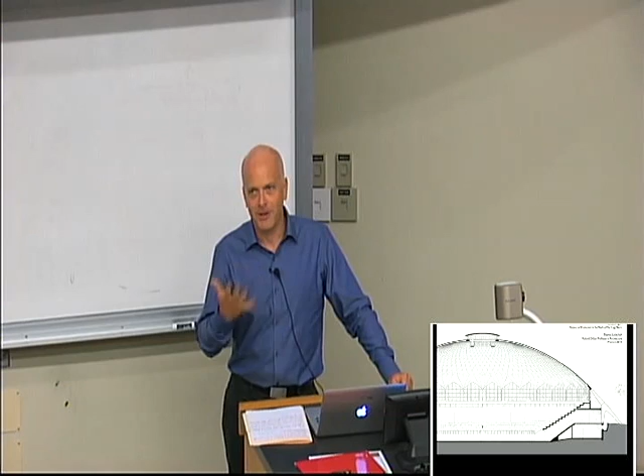I'm going to try to tell a good story, of course, but I've tried to put just enough English on it so that I have an excuse to show you some really amazing stuff. There are some new drawings that I did, which are fine, but there are also a whole lot of construction photos, drawings and sketches from Nervi's archives that have never been published before, and some of them I'm absolutely sure have never been seen outside of the archives before. So I'm very glad that you all get to be the first to see some of these.

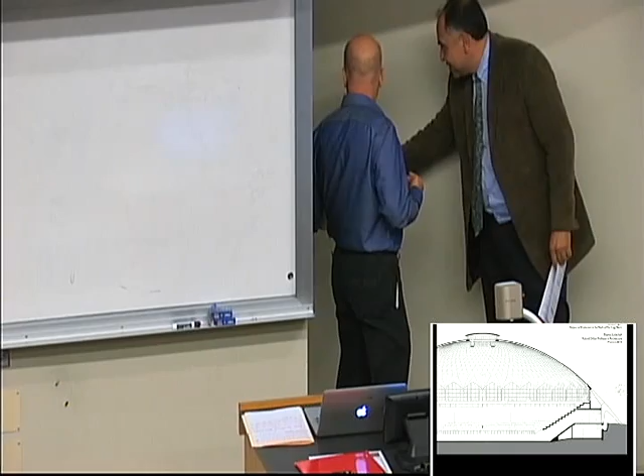Can I get the— Kimberly, which light switch is it? That one? Huh.

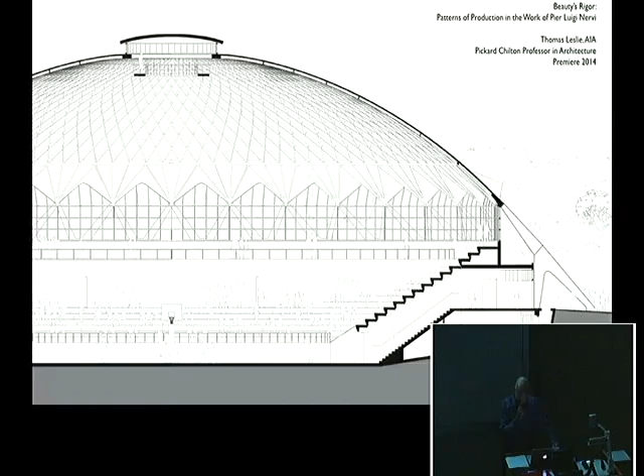The title of my talk tonight, and the sort of working title for the project, is Beauty's Rigor. And this comes from a long poem written by William Carlos Williams. One of the great things about a fellowship at the Academy is that you have time, and you get to do things like read that you don't often get to do in daily life. And this is one of Williams's best known works, but maybe one of his least read because it's such a huge—

Oh, you don't want to see me, you want to see the slides, I'm sure. All right. Perfect. All right. It takes more than a village. It takes a small town, for sure.

So this poem by Williams, called Paterson, which he took 10 years to write and publish—and not coincidentally, this is exactly the time of some of the most important buildings by Nervi that I'll show you. But more importantly, there's a kind of thematic resonance here. Williams was trying to argue for a kind of return to the real world. High modernism had been very abstract in literature, and Williams was trying to get back down to the stuff of life. And to do this, the poem's set in Paterson, New Jersey, and his point was trying to prove that beauty—unlike this opening line of the poem where he says that beauty is locked in the mind—he wanted to show that beauty was out in the world. And I'll come back to this and explain why this kind of frames the talk I want to give tonight.

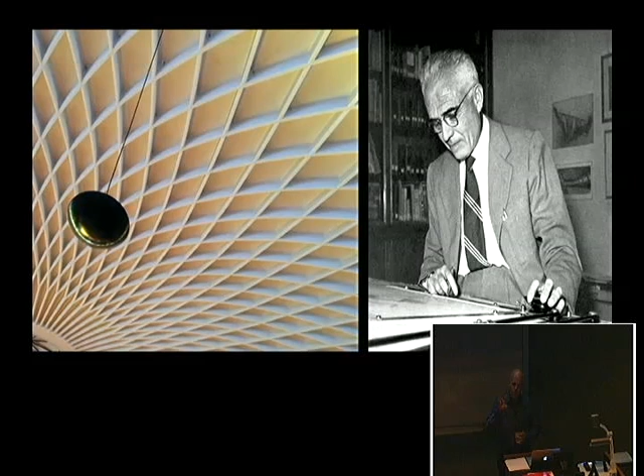And this, to me, has become increasingly important. I've always been interested in structural engineering. I've been more and more interested in how structural engineering and construction kind of argue with one another, and in turn argue with design, and how really good designers are able to synthesize all three of these things. So for me, Nervi is perfect. He's trained as an engineer, trained as a builder, not trained as an architect—although his son was, and his son Antonio played a bigger and bigger role in the firm through the 60s.

The project that I went to Rome to do involved trying to understand where Nervi's work came from, why his work seems so much more engaging, so much more beautiful, so much more thoughtful than a lot of the structural engineering and architecture that went on during the same era. And what I came back with is an understanding that Nervi was uniquely poised to take advantage of things that were going on in Italy. But his career was also uniquely constrained by the economy, by the political situation, and by the resources that he had to work with.

And like many great architects, like many great designers, those constraints didn't necessarily frustrate him, but they actually forged this very disciplined approach to designing things and to building things. And the engineering, the design, the building all sort of reinforced each other because they had to.

I want to talk about those constraints tonight, and I want to talk about how Nervi forged this way of working out of them. And then I want to blow that up into this larger discussion about ideas and things, and about why we think of beauty and rigor as separate things, and maybe why we should think of them as conjoined instead. So the talk will be in three brief acts.

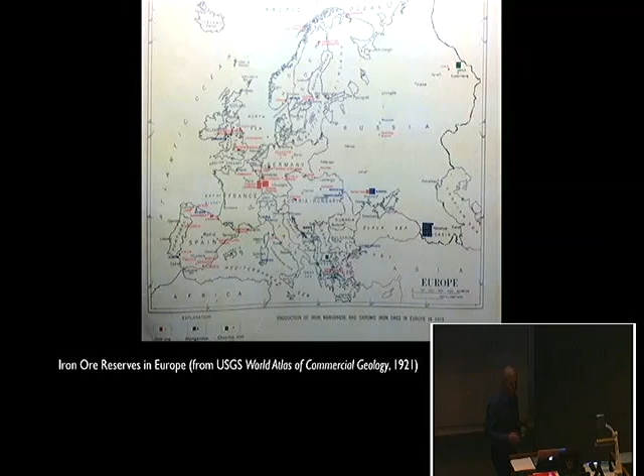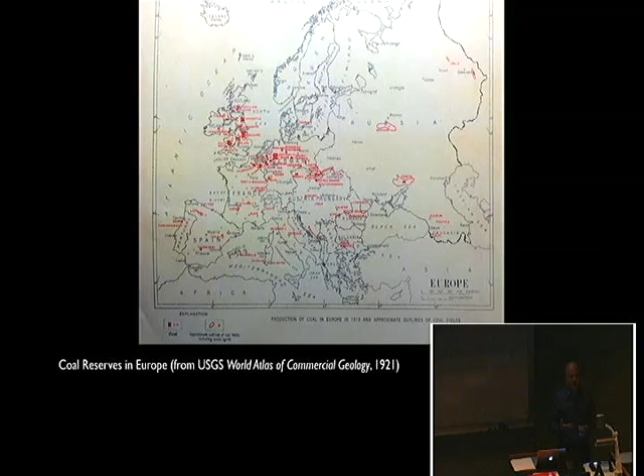There's a similar map that shows coal reserves in Europe. These are both published in 1921, right about the time Nervi was beginning his own practice, early in his own practice. And you see the same thing - Italy has not only always had to import its iron, but it's had to import its energy. It has no naturally occurring coal resources to speak of. It has to bring coal in the 1920s from Great Britain. And it's also had to do this with petroleum. So it has an iron deficit and it has an energy deficit.

One of the solutions you see in the southern European countries to the lack of metal, to the lack of steel, is a reliance on concrete. When we think of the great concrete engineers, particularly Torroja in Spain and Nervi in Italy, these are southern European phenomena. And there's a kind of southern European approach to concrete that again comes from necessity. There's not enough steel to build like they did in France and Germany and England. And so they instead turned to concrete.

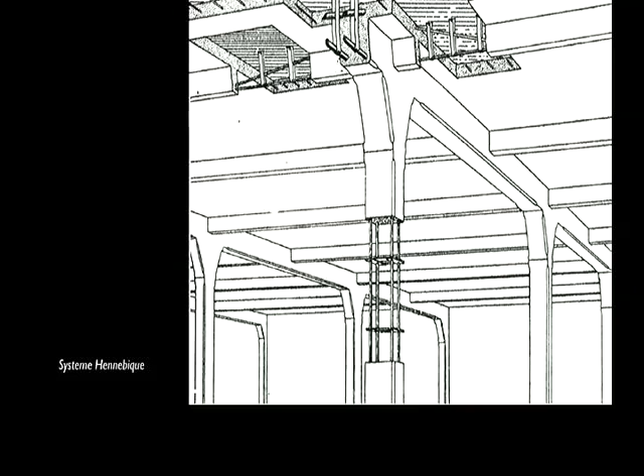Concrete was perfected as a structural material really in France by Hennebique around the end of the 19th century. And you can see that in the Système Hennebique, he has taken concrete's strength in compression and combined it with minuscule amounts of steel reinforcement that take up the tension that goes into a bending member. And what this means is that you're essentially tricking concrete into thinking that it's a metal, into thinking that it's steel, into behaving like that.

It can take bending in a way that raw concrete or stone or brick can't take. And you can see the development of these skeletal systems of concrete around the end of the century that sort of look like steel skeletons, but are built predominantly with the material that was cheaper and that was available in more parts of Europe.

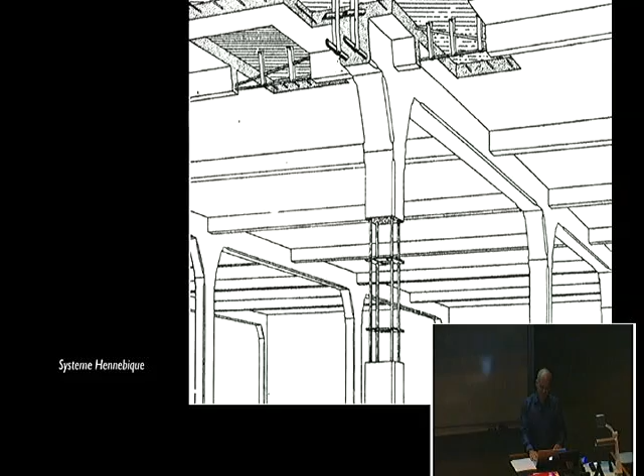The Système Hennebique applied not only to buildings, warehouses, and factories, but also to bridges. In 1911, when Nervi was a young student in engineering school, one of the great achievements in concrete engineering happened in Rome: the Tiber River, bridged for centuries with multiple stone arches, was finally bridged in a single span using the patented Hennebique system. It was designed and built by a licensee named Porcheddu, relying on the monolithic nature of concrete.

There's a famous incident where German engineers wrote to Porcheddu and professors at the University of Rome saying, 'We're very worried. We've seen the drawings for this bridge, we've done the calculations, and it simply can't stand. It's too thin. You need to stop construction immediately.' The letter that went back said, 'Thank you very much for your concern, we finished the bridge six months ago and it's fine.'

Nervi told this story over and over again. As big a fan of concrete as he was, he hated academic engineers, and used to tell it as the lesson that what's actually out there in the world, what's actually tested, is important. The reason the Ponte Risorgimento stands when traditional methods say it should fail is that concrete is monolithic.

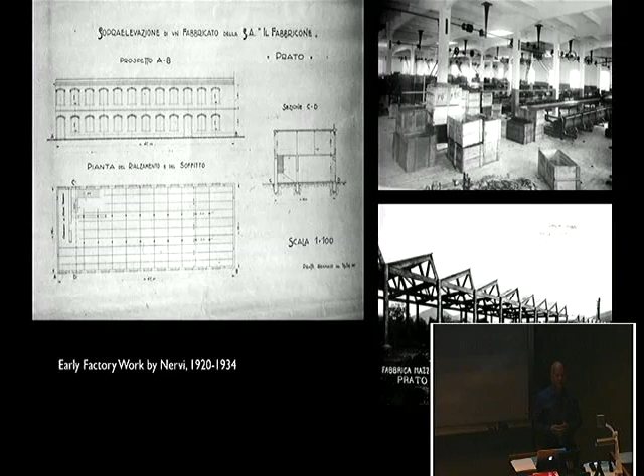He went to work for Muggia and then set out on his own in 1920, and for several years did very pragmatic factory buildings, particularly in the textile town of Prato. These are all essentially based on Hennebique's system. If you look at the image on top, you basically see a reinforced concrete skeleton, very much like Hennebique had patented, nothing really terribly innovative.

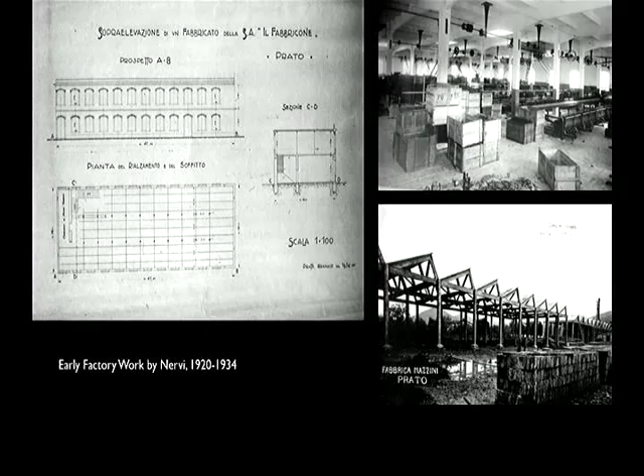Nervi developed a reputation as a very effective designer of factories and warehouses. You can see at the bottom a thoughtful approach to things like daylighting, long span structures, and trusses, all executed in concrete.

But Nervi's early career occurred against a political background impossible to ignore. In the 1920s in Italy, Mussolini had just come to power in 1922, and part of his propaganda campaign relied on autarky, that Italy should be entirely self-sufficient and didn't need the rest of the world. This got even more serious in the 1930s after the country invaded Ethiopia, and the rest of the world brought crippling economic sanctions down, forcing Italy into this very serious autarkic economic policy.

In some sense, this meant concrete was even more desirable, because all the materials for concrete were available in country, while reinforcing steel was not, making this a difficult negotiation. You see buildings by architects like Piacentini, such as the University of Rome, constructed in 1935, of what Nervi called weak concrete—concrete that was almost all bearing, under-reinforced, without the amount of steel we'd typically expect today.

You can see that the columns here are very big, the windows very small. It looks like a Roman brick building in terms of its proportions, and it's clad in travertine, which was Italy's number one kind of building material to export. So this is seen as an autarkic building by the fascist regime.

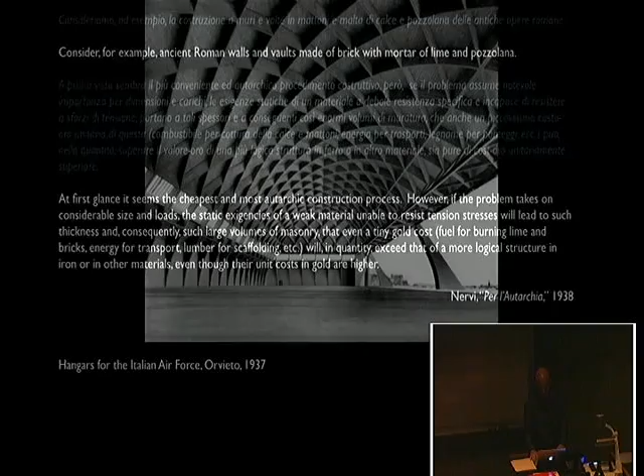Nervi's strongest argument for concrete, though, was this incredible set of hangars he built for the Italian Air Force in the late 30s. He got the commission in part because he had this dual office—a structural engineering office and a contracting office—and he was able to undercut all of his competitors. He did this in a couple of ways.

The initial set of hangars built at Orvieto in 1937 have this vaulted lamella roof. Lamella just means diamond-shaped, and what those ribs do is trick the concrete shell into thinking it's much deeper than it really is, behaving like a much deeper shell. People often think of the Pantheon, which has these great deep coffers that scoop out dead weight of the dome so it thinks it's really thick but only weighs as much as a thinner dome.

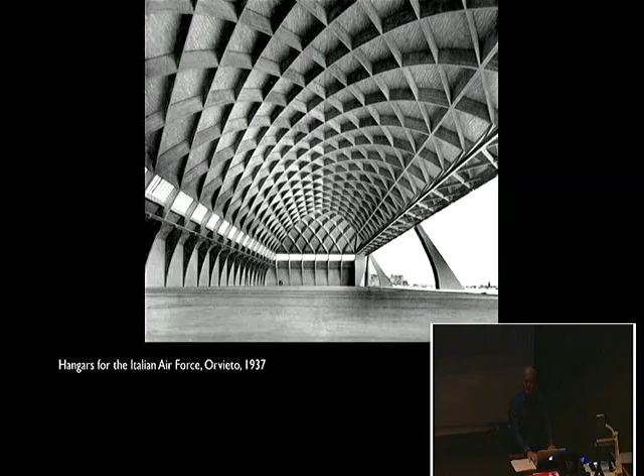There's a similar process here. The lamella pattern means the hangar roof resists gravity loads and wind loads with the same ribs, the same structures. You can see it's set up on relatively skinny buttresses that run all the way around the back. This was a cheaper hangar than anything the Italian Air Force had built to that date, and there was the claim that it was sort of autarkic, that this was all done in concrete.

This is where the archives come in. Nervi wrote a couple of very cryptic things where he said that actually these hangars were kind of a failure, and never really elaborated on it. But when you look at the construction process, what you realize is that the monolithic nature of that concrete, the fact that the shell is all one piece, meant that Nervi had to build the hangar twice—a complete timber formwork for the entire hangar, then pour the concrete into that formwork.

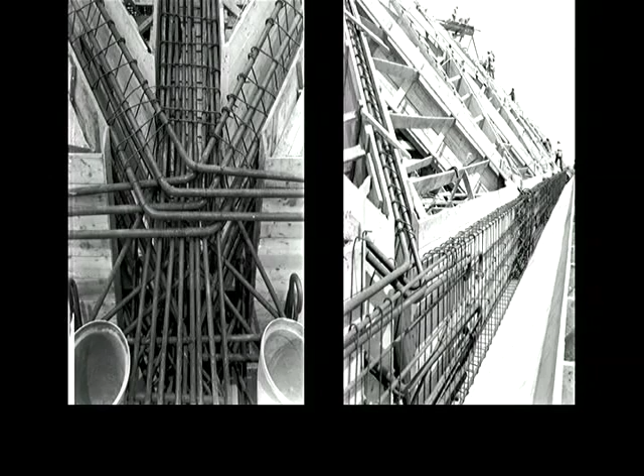As for the reinforcing, this was a real shocker to find: as those ribs come down and collect all of this force, all of these loads, as they enter into those buttresses, what you're looking at isn't really concrete. What you're looking at is steel with a little bit of concrete painted on the outside. This is a heavily, heavily reinforced solution.

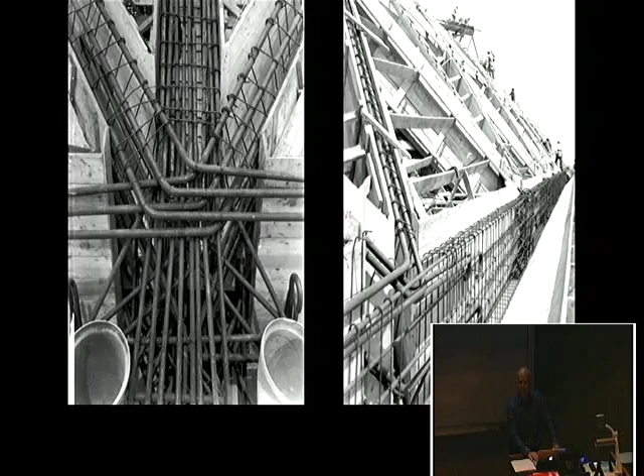Nervi wrote sort of despairingly of these, that everyone thought they were incredible examples of new engineering, and Nervi alone knew that they were essentially a failure, that they were claimed to be autarkic, when in fact they were heavily reliant on foreign materials.

Nervi's solution to this was to try to find a way to eliminate most of the timber formwork - to see if he could actually prefabricate elements of the hangars, lift them into place on smaller, lighter formwork, and then use small bits of reinforced concrete to glue all those pieces together, to get a monolithic structure out of a lot of very small pieces.

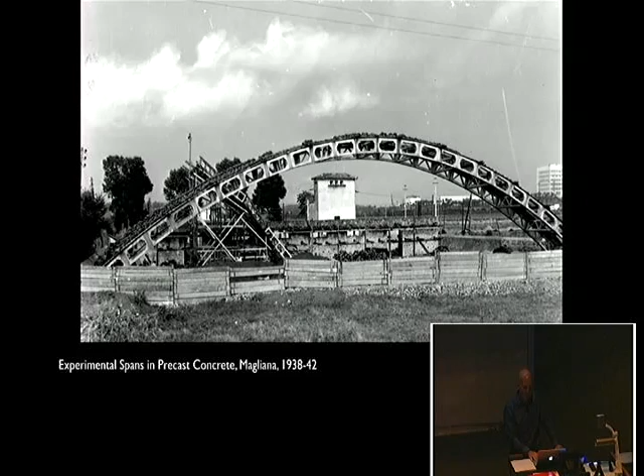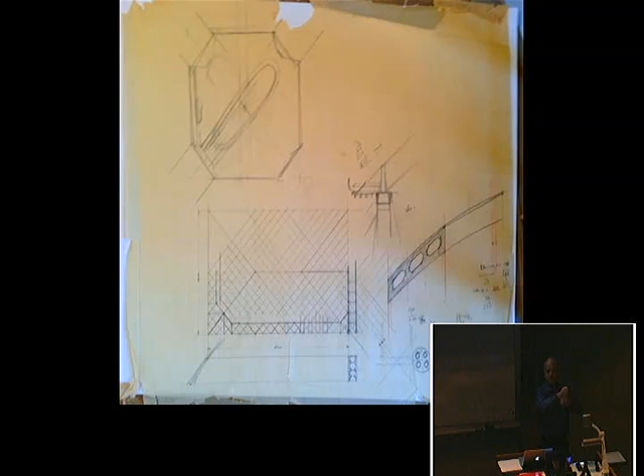And on top, he's showing little loops of steel reinforcing sticking out of the ends of one of those truss pieces. The octagon is a very small amount of poured concrete that's going to grip onto all of those loops of rebar and essentially make all of these little precast Lego blocks into one solid unit. He's found a joint he's going to use to make a monolithic structure out of a lot of very, very small elements.

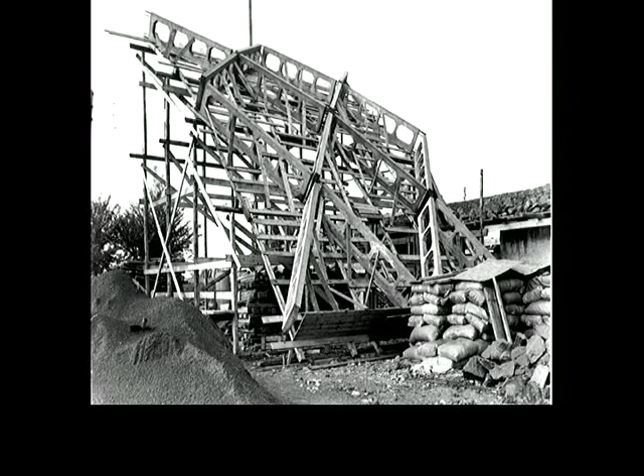And when you look at the construction photos from Magliana where he's building prototypes, this is exactly what he does. You can see that the units are sort of four bays of truss. There's a little void there, and if you look closely, you can see the reinforcing sticking into the void.

And now they're going to come along and fill that void with concrete. As the concrete cures, it's going to grab onto all of those little bits of rebar and make a very monolithic joint.

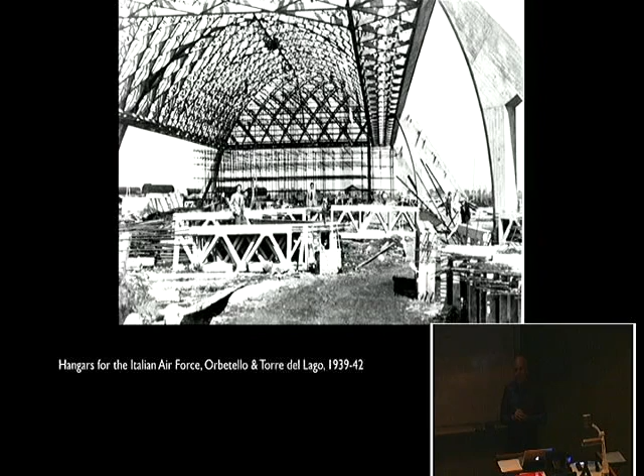In 1939, he gets another commission for more hangars, these in Orbetello and Torre del Lago on the west coast of Italy. And in the construction photos from these, you can see a couple of interesting things.

He's precasting the truss work on the ground, so they don't have to be pouring a lot of concrete up in the air. He's lifting them into place on cranes, and you can see that the formwork covers about one eighth of the entire structure - that is all the scaffolding he needs to put these in place. Once that concrete's cured, he can remove that scaffolding, move it to the next bay, and repeat the process.

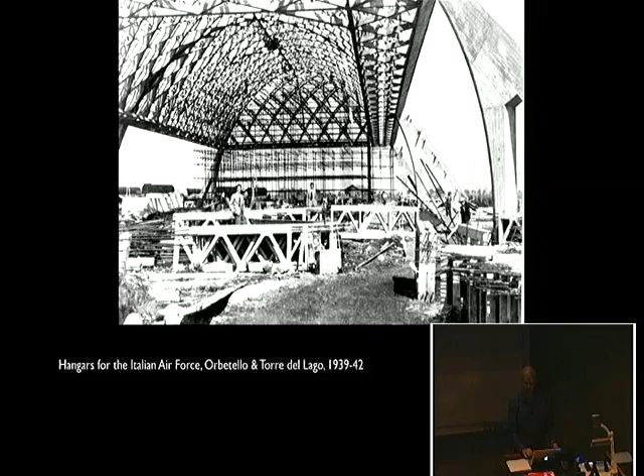So he's saved on timber formwork - he doesn't have to build the entire thing out of wood and then out of concrete. He's saved on timber scaffolding, because he only needs this little bay to pour one kind of unit at a time. And he's saved on reinforcing, because instead of solid concrete, he's built the roof out of trusses. The trusses weigh less, which means the support that holds all of these up carries less load, and therefore needs less steel. It's kind of a miraculous transformation.

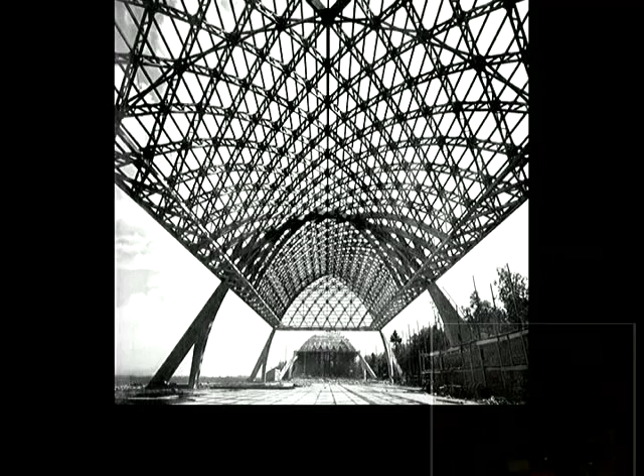And the results, aesthetically, are absolutely amazing, too. Another interesting thing that happens is as these are approaching completion, Nervi's construction documentation goes from sort of a guy on site taking photos to hiring a company called Studio Vasari, an architectural photographer in Rome known for shooting high-end apartments and major public spaces.

Nervi realizes that there's something really, really beautiful about these hangars that deserves better treatment than just the guy on site documenting progress. Vasari shoots these very famous photographs of the hangars before the lightweight roof covering goes on. You can see that they're open trusses, very lightweight, and that things get dense at the junctions.

That's the reinforced concrete holding these pieces together. And you can see that they're now standing, instead of on the 24 buttresses around the back, on 6 points, 6 buttresses that are just barely touching this roof. That's how lightweight, how much weight Nervi saved with this precasting process.

These were all blown up by the German army when they retreated. And there are two stories about that. One, the official one, is that Nervi was heartbroken and that the shells actually bounced, right? They were so, the concrete did its work so well that the shells came down to the ground intact.

The story that I've heard that I can't back up, but that I really want to believe, is that someone comes into Nervi's office and says, you know, the Germans have blown up the hangars, and Nervi says, thank God, every day I've worried they were going to fall down on their own. I don't have to do that anymore.

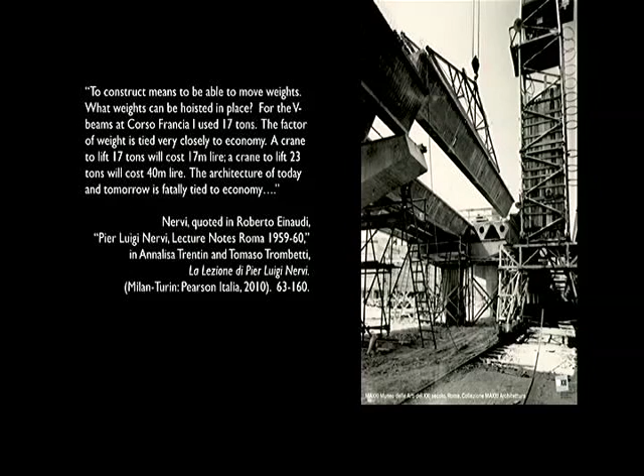The factor of weight is tied very closely to economy. A crane to lift 17 tons costs 17 million lira. A crane to lift 23 tons costs 40 million lira. So this ethic of autarky, even though by the 1950s it's history in Italy, has stuck with him. Nervi is constantly looking for the most efficient way to build, to make things as light as possible, and to use the least equipment on the job site.

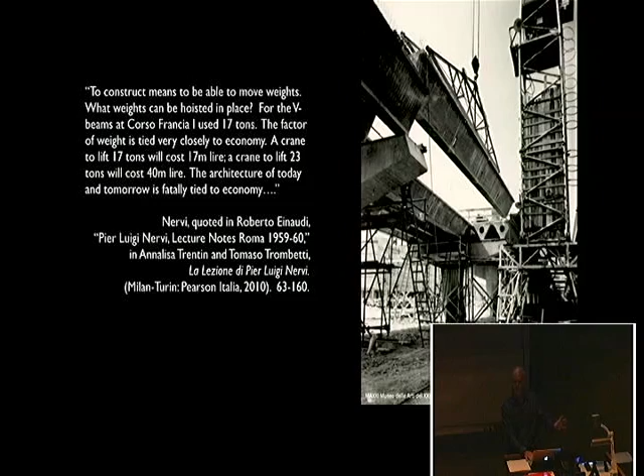Nervi e Bartoli, the contracting firm, was throughout its entire history very small. A couple dozen workers, mostly unskilled, and without the huge construction equipment you would have expected from a big international firm. This, I think, gets to the heart of why he was able to do that. He was constantly paying attention to what could be cast by a few construction workers and lifted into place by a small crane. Il cantiere, which in Italian means both the job site and the shipyard, is one of these kind of useful mistranslations.

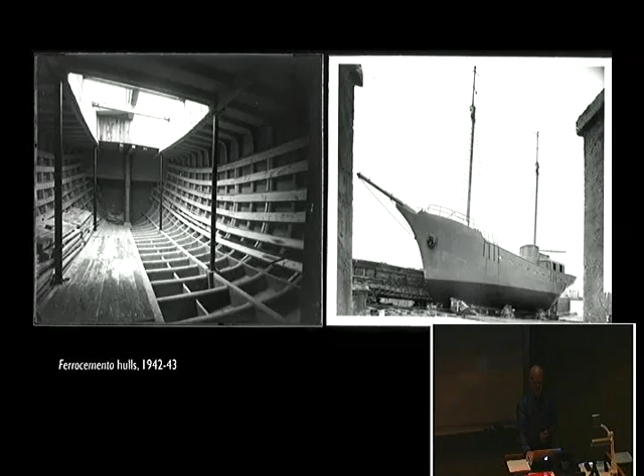It turns out that as Nervi was finishing up the hangars, he did a small project for the Italian Navy. The Navy came to Nervi's firm and said, we can't get the steel that we need for warships. We'd like to explore the possibility of building them out of concrete. This is not a new thing; it was done even in the late 19th century. But Nervi was an innovative engineer and thought the problem through, managing to produce 3 or 4 hulls for the Italian Navy before the program was scrapped in 1943.

Weight, of course, matters if you're building a hangar, but it matters even more if you're trying to float a ship. Weight is super important. Nervi's designs for these boats show a material development he would carry with him for the rest of his career, called ferrocemento. You can see in the big section here, these ship hulls all have beams and structure running across the hull, but if you look very closely, you'll see that the skin of the ship is actually very, very thin.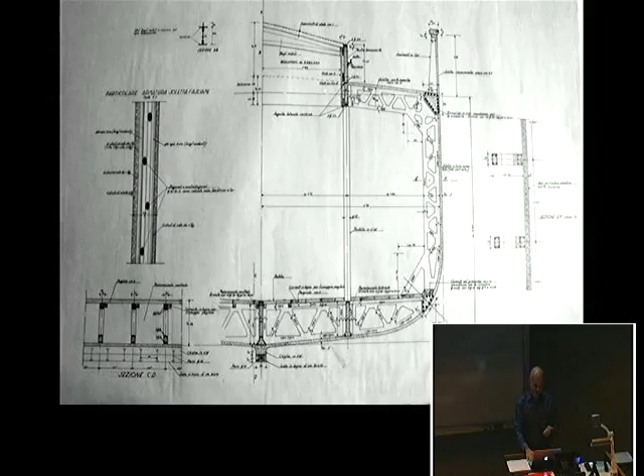And this detail on your left, if you blow it up, you can see this is made up of a handful of reinforcing bars, very scattered, much less than you'd expect to see in a typical concrete slab. Sandwiched around those reinforcing bars, which hold the basic shape of the ship, is wire mesh, which was a scrap material like the screens in your windows today, that the very small steel industry in Italy essentially treated as a waste product.

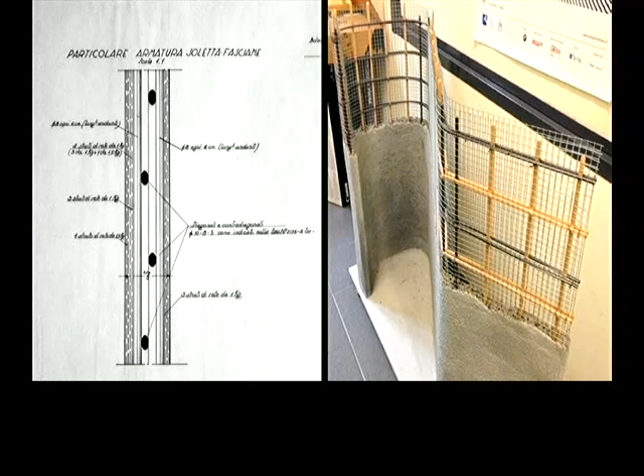What Nervi realized is that if you layered that mesh together 7 or 8 times and pushed lightweight cement through it, when that cement cured, you would get a very thin, relatively pliable, and very sturdy plate. A plate that would look like concrete, but that would behave like steel.

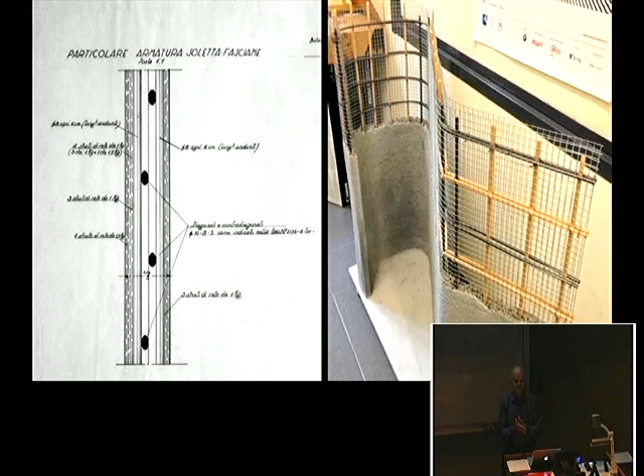This on the right is a mock-up of ferro cemento made by students in the History of Italian Engineering program at University of Roma Due. You can see they've used reinforcing bars to get the basic shape, laid metal screen over that to get a kind of planar element, and then just literally mashed a really lightweight cement through that. What you get is like a hack - you're hacking cement into thinking that it's actually steel. It behaves almost like a steel plate.

Talking about similar projects, Nervi notes that prefabrication gets you only so far in saving weight, and that ferro cemento, this technique of making very thin, reinforced wire mesh plates out of concrete, saves you even more depth and even greater weight. So 3 inches is the minimum thickness of reinforced concrete, but if we use ferro cemento, we can reduce this thickness to half, to 1.5 inches.

Here you see a ferro cemento piece being put into place on a stadium in Rome, lifted by relatively lightweight tower cranes.

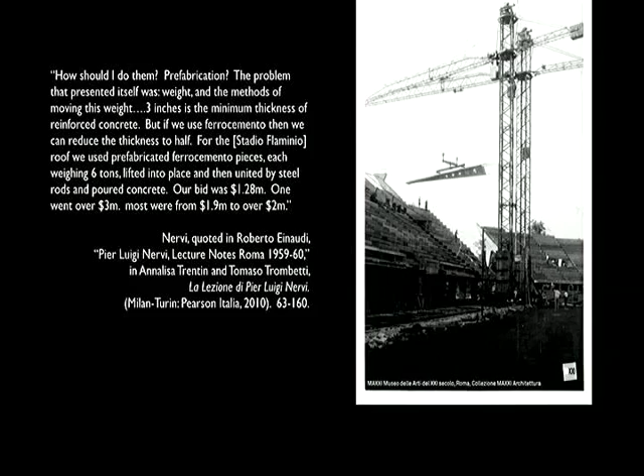These two ideas, prefabrication and ferro cemento, come together in a project that Nervi does right after the war in Turin. And it's this project, I think, that establishes the system Nervi, as it comes to be called, this combination of prefabrication, structural engineering, and ferro cemento. This is a project that the automakers in Turin, having been heavily bombed in World War II, wanted to announce to the world that they were back, up and running.

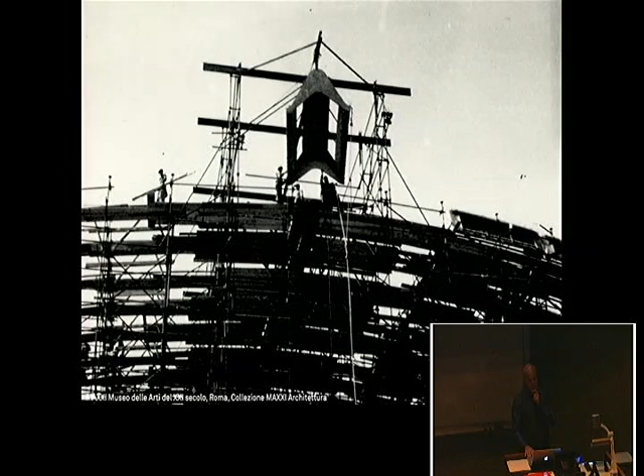They realized too late that in addition to their factories, all of their exposition halls had been bombed. Nervi agreed to do the project and said that he could design and build it in 8 months. To do this, he relied on these two principles, prefabrication and ferro cemento.

He built essentially hundreds or dozens of little concrete hulls, sort of like canoes, each of which was a sort of folded plate. If you know your structures, a folded plate tricks a thin layer into thinking it's a really deep layer. Each one of these is small enough that it could be lifted by a crew of 4 or 5 people, trucked over to the site and put into place by the winch you see there. No tower crane on this site.

It could be put onto a scaffold that, like the hangar at Orvieto, could be built discretely, dismantled, moved along the hall and reused. Once in place, using very small amounts of reinforced concrete at the trough and summit of each one of these, Nervi could turn this collection of concrete little canoes into a system of very thin arches, all stabilized by the walls of the individual units.

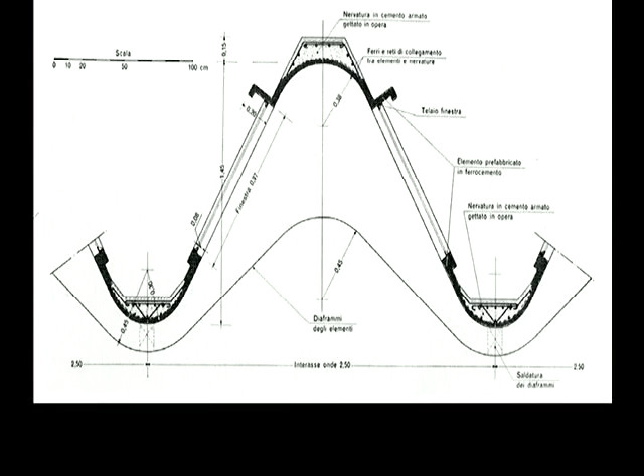What's amazing to me about this is it's about 5 structural techniques at once. It's a long, shallow arch that acts a little bit like a beam. It's a folded plate that, if you think of an I-beam, has a flange at the top and bottom, and a web where the window is that takes the place of the centerpiece of a steel I-beam, which means it's a great shape for bending.

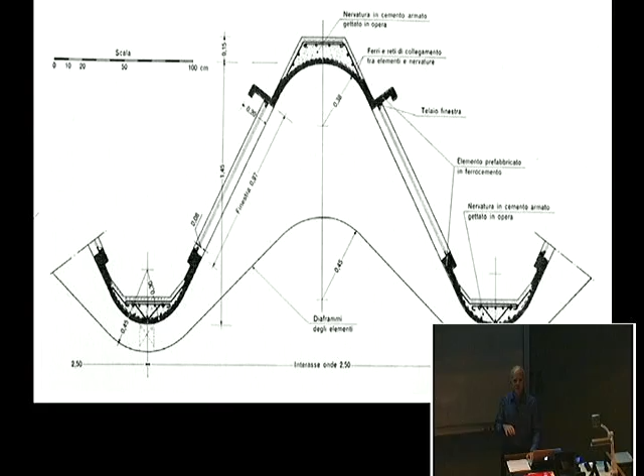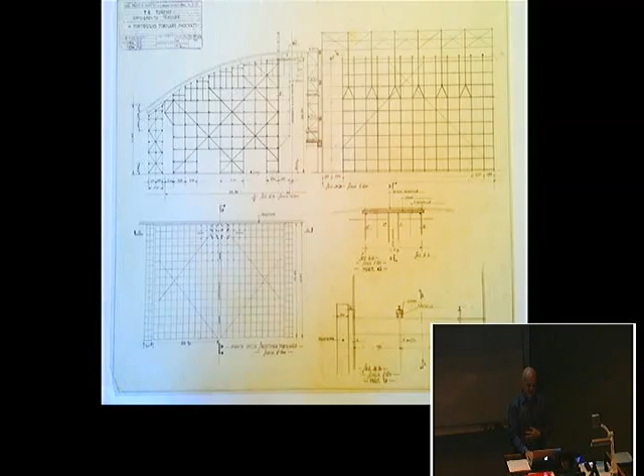And here's the scaffolding drawing. This is maybe one of the keys to the whole project: Nervi, as the builder, had to think through the process. So here he's thinking about the minimum amount of scaffolding they can get away with, what's the smallest piece they can build at one time. Once that cures, dismantle the scaffolding and very quickly move it to the next stage.

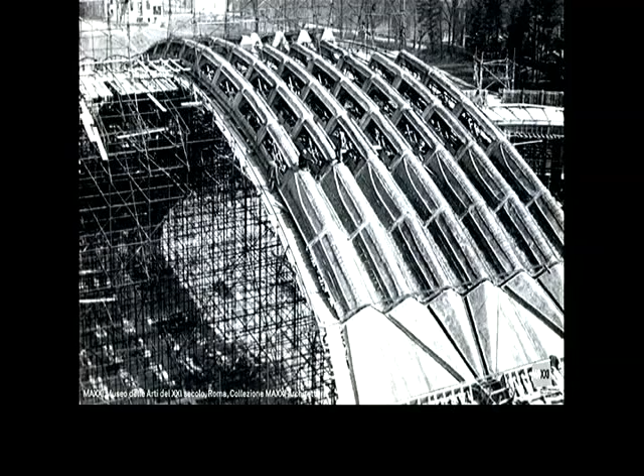At the ends, you can see that the loads from those are getting gathered by these ferrocemento fans.

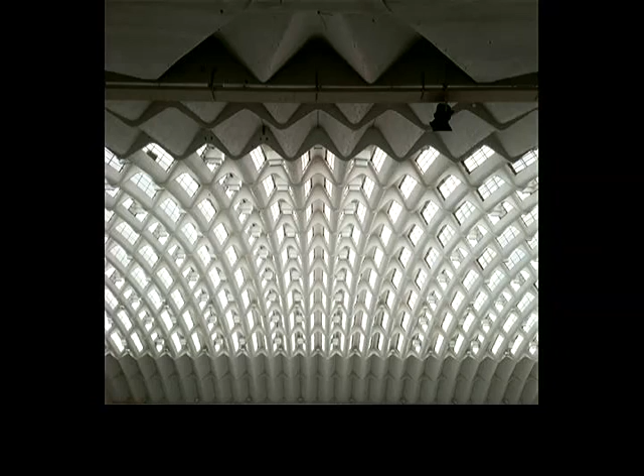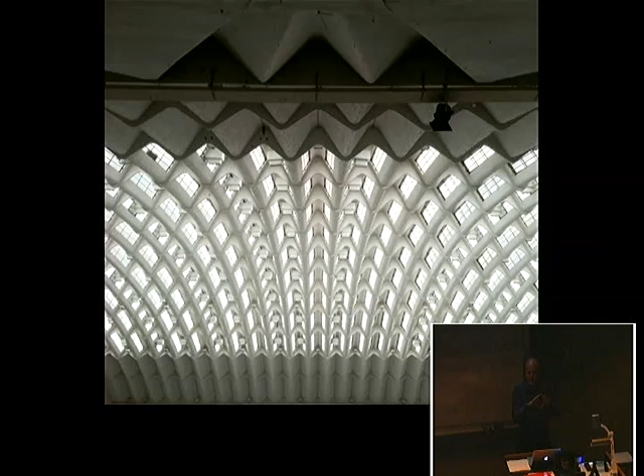And there's the result. If you look closely, you can see that the arches get deeper and deeper as they get toward the center, and then they get skinny as they get down toward the ends again. It's a two-hinged arch, so it's allowed to flex a little bit at the bottom. This also reflects the fact that it's not really an arch, it's also a beam. It's behaving in bending, and it's behaving in compression.

You can also see that Nervi's bringing in daylight through the webs. The webs are where the roof is stressed the least, so all of these have windows that bring in a flood of daylight. At the same time, you're looking at this amazing pattern of this sort of rippling surface. You can see the human scale comes from the size of a single unit that workmen are actually able to lift.

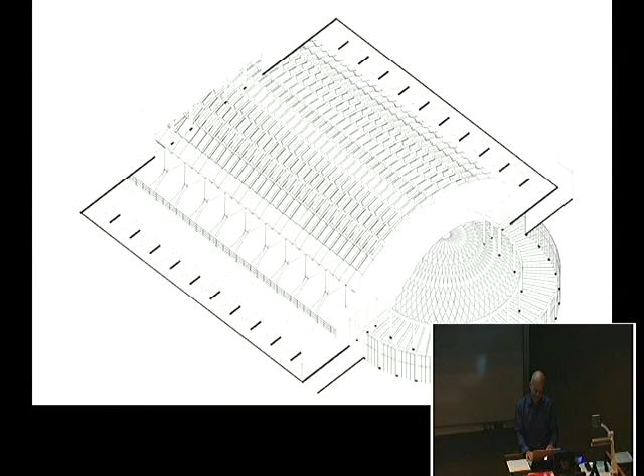So here's the overall roof. It was finished on time, under budget, and it was used for about 50 years, really until the turn of the century, as the premier place for Fiat to show off its new models.

It's a combination of poured concrete buttresses and this ferrocement hull roof. Then in the back, there's this very interesting apse that was the result of an old architectural master plan. Nervi uses a similar approach here: he uses prefabricated ferrocement pans.

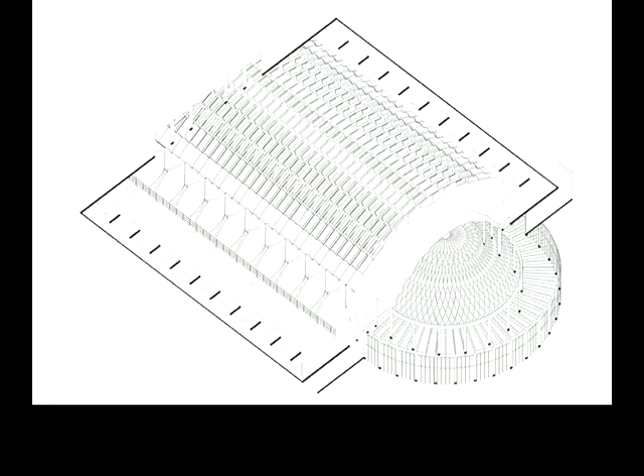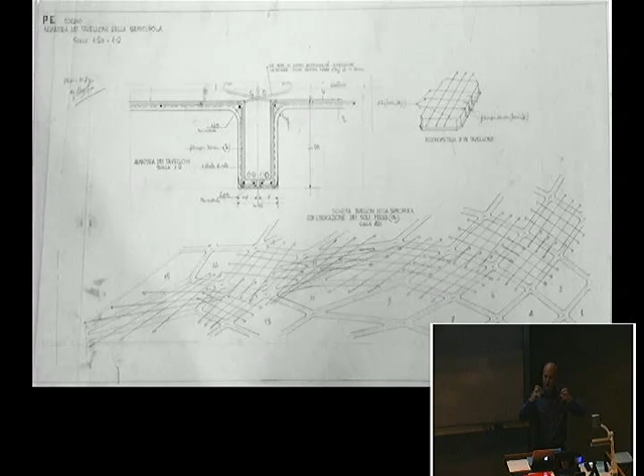But these ferrocement pans are actually tiled around a domed surface, very much like the Pantheon. The square coffering of the Pantheon gets smaller as it marches up. Here Nervi's designed a diamond-shaped pan that gets smaller in families as it approaches the top. What that leaves him with is a set of intersecting ribs that again coffer the dome, making it behave like a dome that's much thicker, but with far less weight.

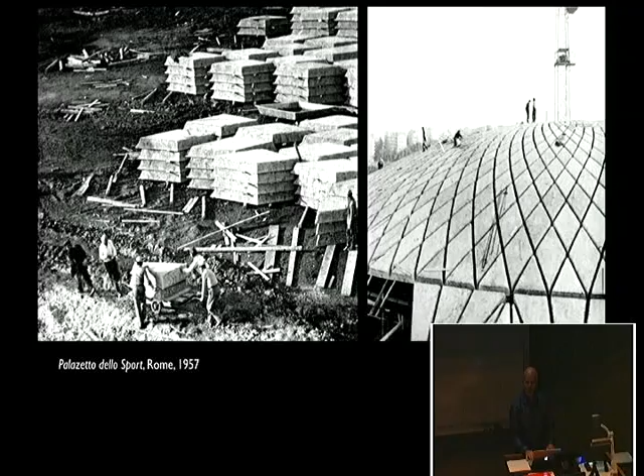Once they're placed, there's a light reinforcing screen that goes over the top of them. Concrete locks all of those into place. They're held up on buttresses, just like the roof of the Turin Hall. On the inside, you get this incredible starburst sunflower pattern.

And of course, you look at this and you think, what genius designed this pattern? The reality is that Nervi didn't design the pattern, he designed the process. He designed the way to make this out of discrete diamond-shaped units. The pattern emerges from all of that.

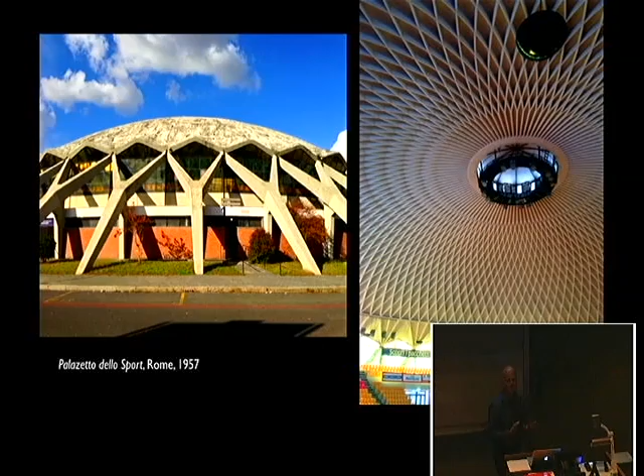There's no reflected ceiling plan of this building. Believe me, I've looked. There's a drawing that shows what the size of each pan needs to be, what each family of pans' dimensions have to be. But Nervi never sat back and said, what would that look like if we put it all together? The first time anyone saw what that pattern would look like was when the building was completed.

In section, you can see that Nervi is thinking about how you understand the dome. He's lifting it up on forked buttresses, putting a glass wall between the structure that makes up the seating and the dome hovering overhead. This lifts the dome up, and you can see through the glass below. The dome feels like it's just been dropped from the sky, sitting on these little points. This thing is nearly 50 years old, and every time I've taken someone to see it, it takes your breath away, even today.

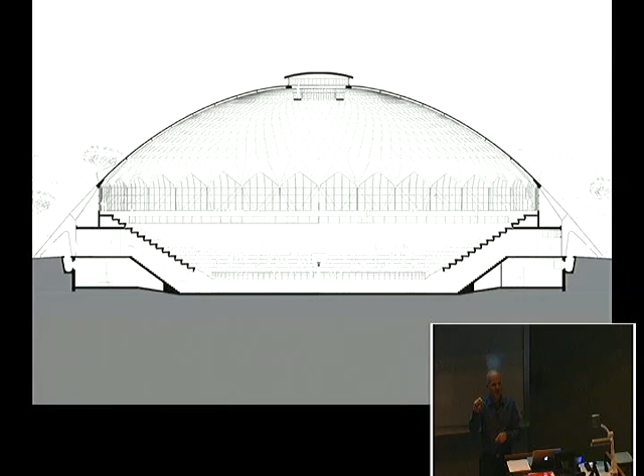It's still one of the thinnest shells proportionally in the world. You can see there's just a thin black line representing the actual concrete shell. It's actually thinner than an eggshell, meaning there's so little weight in the dome that it can rest on these little points around the edges. That also helps with the foundations, makes the buttresses smaller, et cetera.

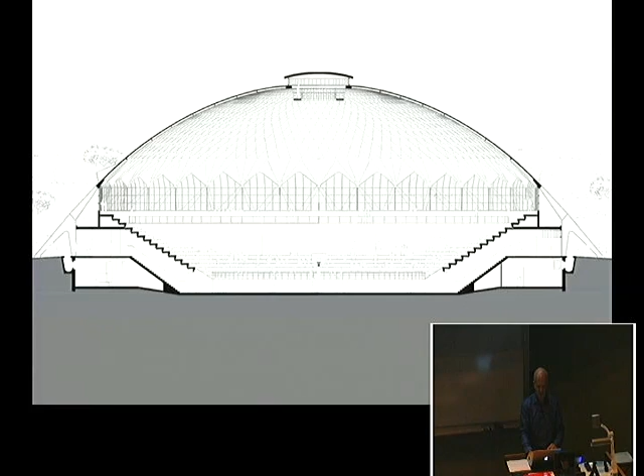The other arena Nervi did for the 1960 Olympics in the EUR is less famous, probably less beautiful, still really striking, but it doesn't get that breathtaking response when you walk into it. This is the Palazzo dello Sport, a confusing pair of names. This one was built by taking the exact same process for the Turin Hall and wrapping it around a dome.

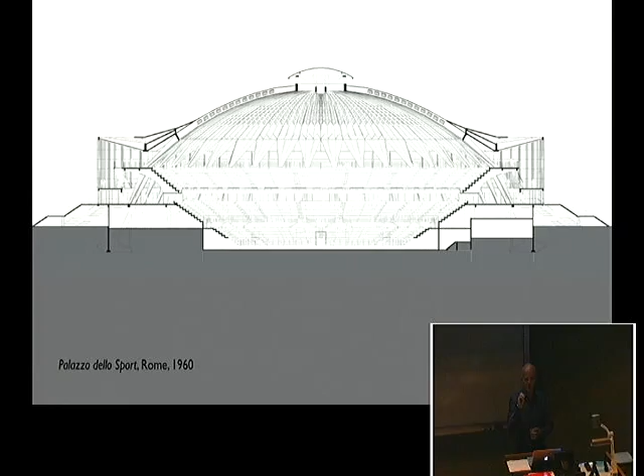So taking these V-shaped concrete hulls and developing them in a radial pattern that could be rotated around the outside. You can see there are also these fans that collect the loads from all of those, so that people can walk around them. On the inside, you get the sense that it's basically the Turin Hall wrapped around a circle.

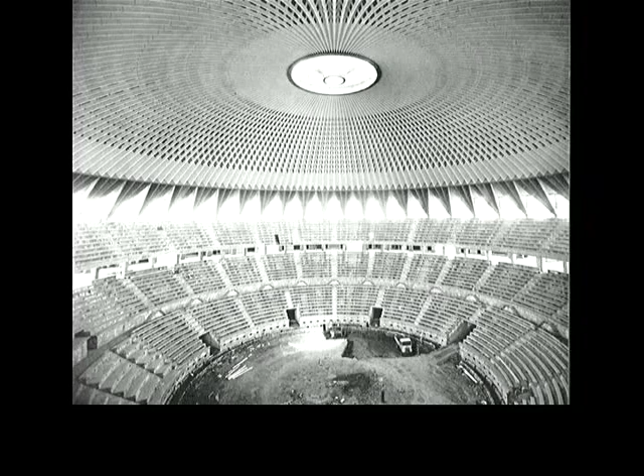Another incredibly, almost impossibly lightweight, thin shell dome, and another project built by a crew of about 25 or 30. Very lightweight elements, very easy to move into place, a repetitive process that allows him to use relatively unskilled labor and undercut all of his competitors.

Nervi won four major commissions for the 1960 Games, and finally the Olympic Committee banned him from competing anymore. There was a velodrome competition, and they said it's open to everyone except Nervi.

Almost as a way to sign the building, the Palazzo, Nervi uses the diamond shape pattern of ferrocemento pans on the underside of the seats. It's almost like he can't resist saying, look what else I can do.

Combined with this other technique I haven't mentioned, equally interesting, these tapering curved surface columns are actually, if you look closely, all made up of straight timber boards that are simply twisted. There's this miraculous way of taking cheap materials, unskilled labor, impossible budgets, and, this being Italy, even more impossible schedules, and finding a way to forge something incredibly disciplined and incredibly beautiful out of it.

Just to show where these go, late in his career Nervi was still using these techniques. The Aula Paolo VI, the indoor audience hall at the Vatican City, which took up most of his time during the late 60s, uses the same ribbed ferrocemento V's to enclose one of the most sacred spaces in Rome.

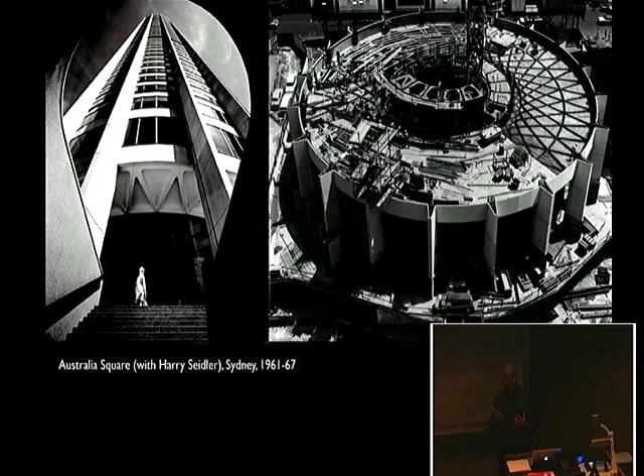Late in his career, Nervi was accused, and I think maybe rightly so, of having a hammer for a solution and therefore seeing every problem as a nail. Almost no matter what he gets hired for, you find these techniques showing up again and again. So when he works with Harry Seidler on Australia Square, this round skyscraper in downtown Sydney, he uses this prefabricated ferrocemento for the lobby ceilings—again, a signature element he almost can't resist using.

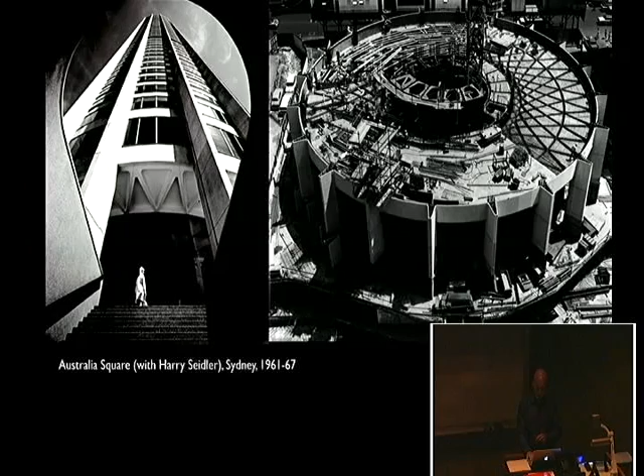That comes toward the end of Nervi's career. He died in 1979, having been relatively inactive for most of the 70s. His son Antonio, the architect, died only six months later, and the office really shut down after that.

In a way, the office had outlived its time. It had forged these incredibly beautiful things out of the constraints of autarky, and continued building with those techniques up through the early 70s.

By the early 70s, though, there was a global market for steel. A younger generation of Italian engineers was using post-tension concrete, with large steel cables to take up big tensile loads. More importantly, they were just using steel full stop. The bridges on the famous motorway from Milan to Naples, the first generation was built out of concrete, but after about 1960 all the major bridges were built out of steel, and Nervi, celebrated as Italy's greatest engineer, built absolutely none of them. The world sort of got away from these few techniques that Nervi had forged during his early career.

Okay, ideas and things, some conclusions.

Paterson is best known for the line 'no ideas but in things.' This is Williams' shot across the bow to high modernism, saying we need to get away from the abstractions of the 1920s and find beauty out there in the world, out there in Paterson, New Jersey. For a long time I would say this has been my stance, that I'm a kind of nuts and bolts guy, and I like looking at actual things, actual stuff that's out there. I think there is certainly value in that.

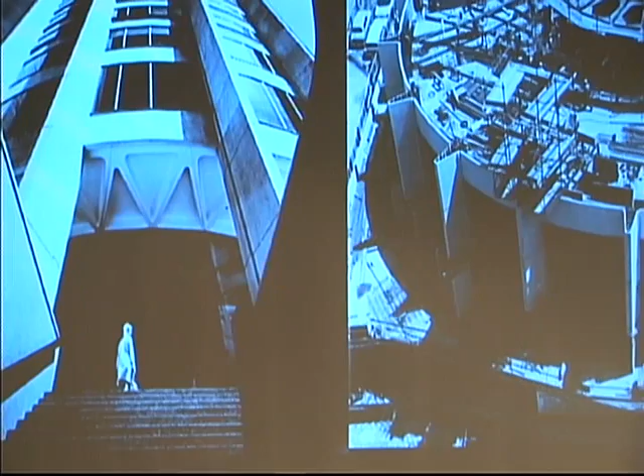Interestingly enough, on Australia Square, if you look very closely, you can see that the joint is actually there. You can see it. And there's correspondence between Seidler and Nervi, where Seidler says, surely you don't mean to plaster these over, these tell you the whole story about how it was constructed. And Nervi, having plastered things over for the last 25 years, goes, oh yeah, of course, what a great idea.

So sometimes it takes architects to tell engineers what they're really thinking. But that's a great question because it gets to the heart of the fact that we see these as kind of monolithic shell structures, and yet the construction story is so important. And that process it goes through is something we as architects love to see exposed. Nervi typically wants to hide it, until an architect comes along and says, you know, there's more to the story to tell.

So there's no part of any of those hangars left, those beautiful hangars, is that correct? Any parts, pieces, any resemblance, anything? Yeah, the question is, is there anything left of the hangars?

There are a couple fragments of buttresses that exist both in Orbetello and in Orvieto. Orvieto is now a farm, and I was told in no uncertain terms that it was not worth trying to find. Orbetello, actually, is fairly near the town. I haven't actually been, but what's left is kind of the boring bits, not the roof shells, which came down and were just carted off, but the walls and little bits of the foundations are still there.